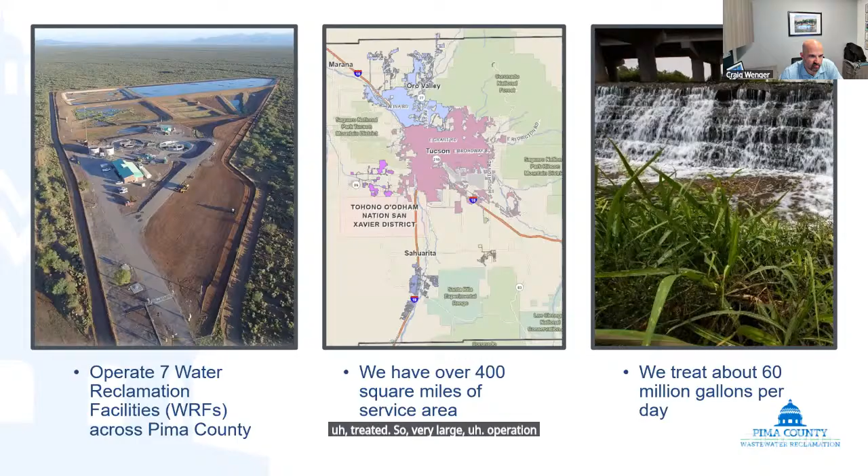Going back several years, there was the Program for Regional Optimization Master Plan, or ROMP, which led to 2 major water reclamation facilities being constructed, the Agua Nueva facility, as well as the Tres Rios facility. So this program that we're going to talk about today is really the next major regional plant that is being advanced.

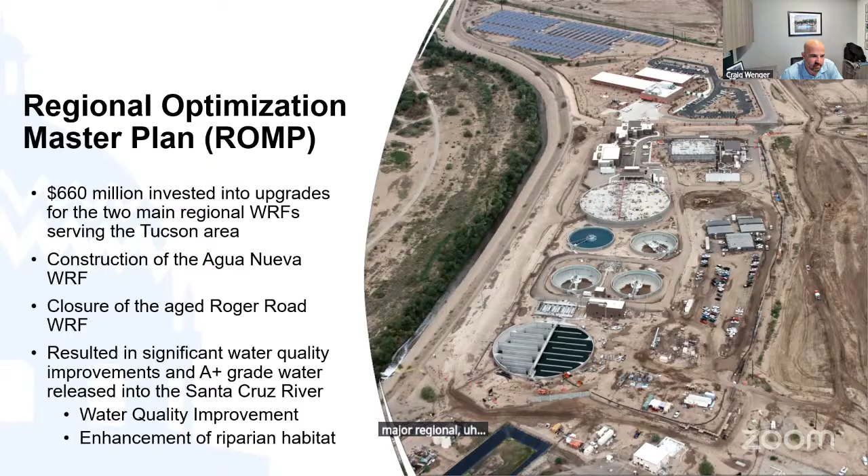So this is a major part of the capital improvement program for the county and for wastewater. There's 3 different projects as part of it: there's the new water reclamation facility, the Sahuarita, and then there's an interceptor, transporting the water that's going to Green Valley up to the new facility, and then eventually the closure of that Green Valley facility.

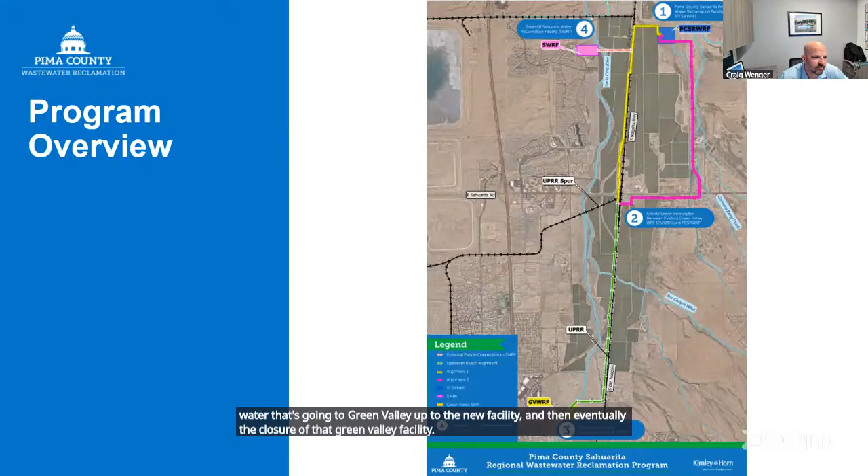So a quick screenshot of what we're talking about here. Green Valley is all the way at the bottom of your screen. And then all the way at the top here in the blue box on the upper right-hand side is the location of the new Sahuarita facility. That is a parcel that the county owns currently. Sahuarita Road is essentially right in the middle of the screen there, so we are transferring all the way up Old Nogales Highway up to the new facility.

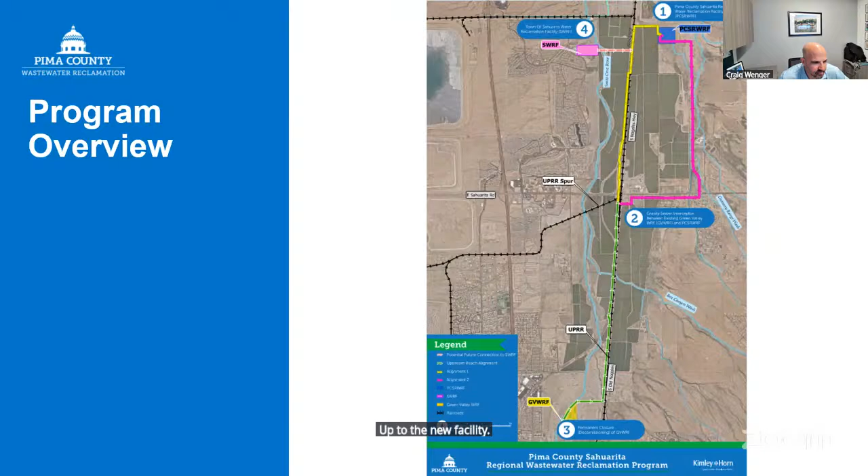So a couple different pieces of the program. Here's a closer view of the site that the treatment plant will be housed on, as well as some of the interceptor options, especially when we get up into Sahuarita Road. There's a couple different options that we see as viable for this moving forward.

We talked about the closure of Green Valley, and then finally, the town's water reclamation facility has a potential to tie over and ultimately transition to the new facility.

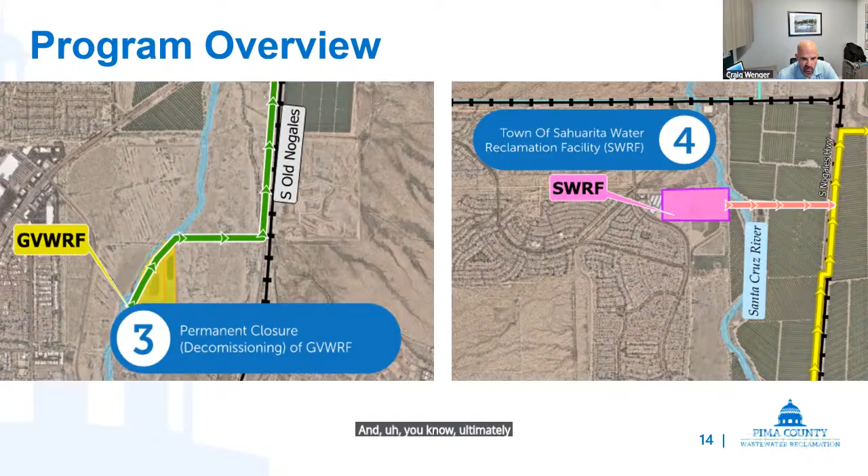So, decisions in progress. There are a number of things that we're working on right now: construction and operational access for the facility, the capacity and technology that will be the basis of design for the facility, the alignments as we were talking about, and lastly, the effluent options.

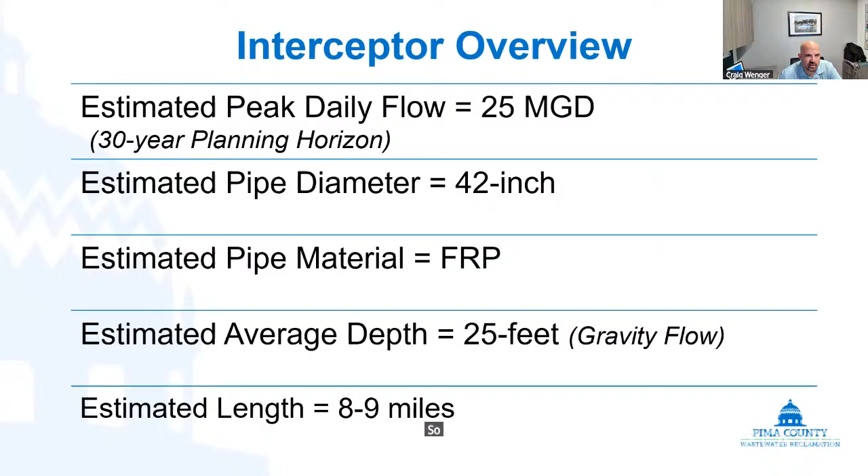So, Ale, you want to give a quick understanding of the interceptor? Yes. So right now, Kimley-Horn has been supporting the county on developing a few preliminary studies to determine minimum design criteria that we're going to be providing for RFQs. Right now, we have the interceptor, which is one of the studies.

Right now for the interceptor, we have an estimated peak daily flow of 25 million gallons per day, and this is over a 30-year planning horizon so far. We had an estimated pipe diameter of 42 inches with a pipe material of FRP or PVC, depending on the selected material or recommendation of the engineer when that one comes on board. Estimated depth, we're looking at about 20 to 25 feet, and right now it's all currently gravity flow coming from the existing Green Valley plant to the new regional facility. The estimated length, depending on the route, is about 8 to 9 miles of interceptor.

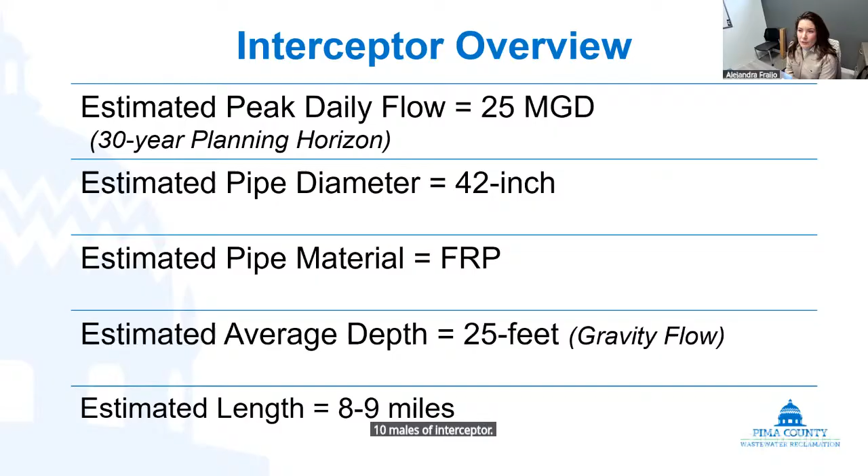All right, so like Craig was saying, we have evaluated 2 main alignments so far. We have alignment 1 and alignment 2. Alignment 1 is pretty much the one shown in yellow. You guys can see that there is a big chunk from the Green Valley facility up to Sahuarita that is in color green. Basically, the 2 alignments follow the same upstream reach, and we're gonna be pretty much on the western shoulder of Old Nogales Highway up to Sahuarita Road. Here is where the 2 interceptors start diverging. We have alignment 1, which is pretty much also on the western shoulder of Nogales Highway, all the way up to the new regional facility.

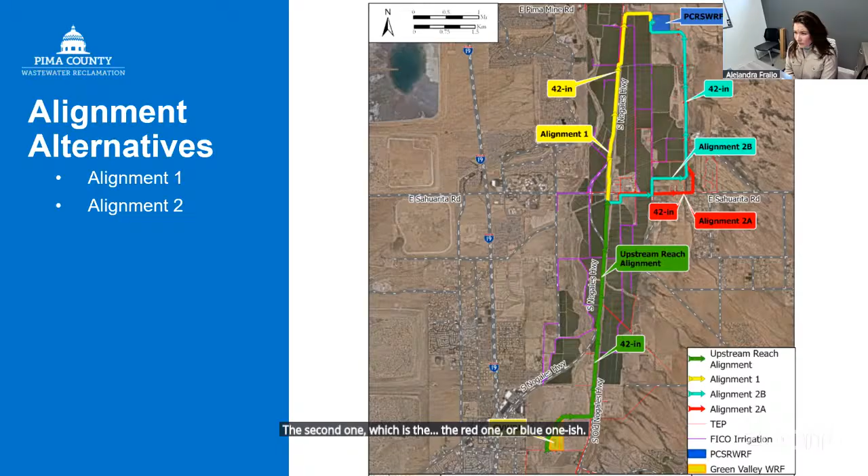The second one, which is the red one or blue one-ish, that one is gonna be going through Sahuarita Road and then going up north next to the pecan fields until we meet the Pima County regional facility. We can go into the next slide.

All right, so we are currently evaluating the facility, at least the treatment technologies that we're gonna be looking into for the new treatment facility. There's multiple options. Next slide.

All right, so the Santa Rita Resource Recovery Facility is gonna be built for approximately 8 MGD. However, when this plant starts operating somewhere around 2031, the initial flows that we're gonna be expecting are gonna be between 3 and 4 MGD. Right now, we are expecting those flows because the existing capacity of the Green Valley facility is about 2 or 3 MGD. So by then, we're anticipating initial flows of that, and then hopefully reaching its capacity of 8 MGD in the 30-year horizon. We are also designing this facility to have phase expansion capabilities here.

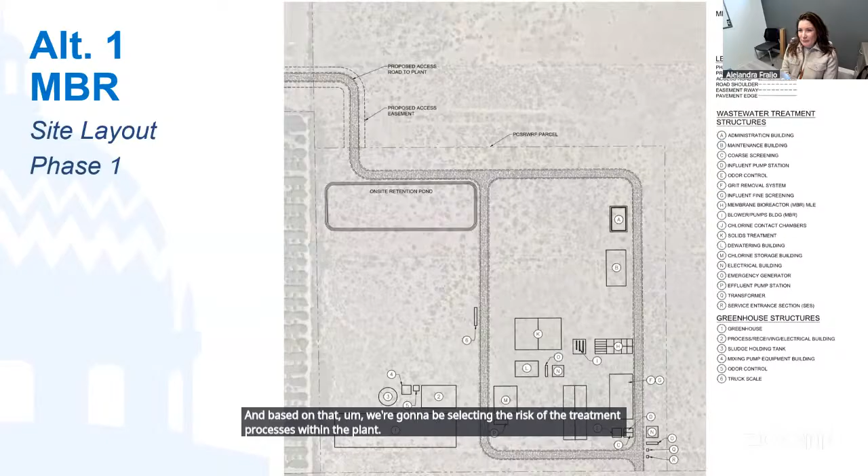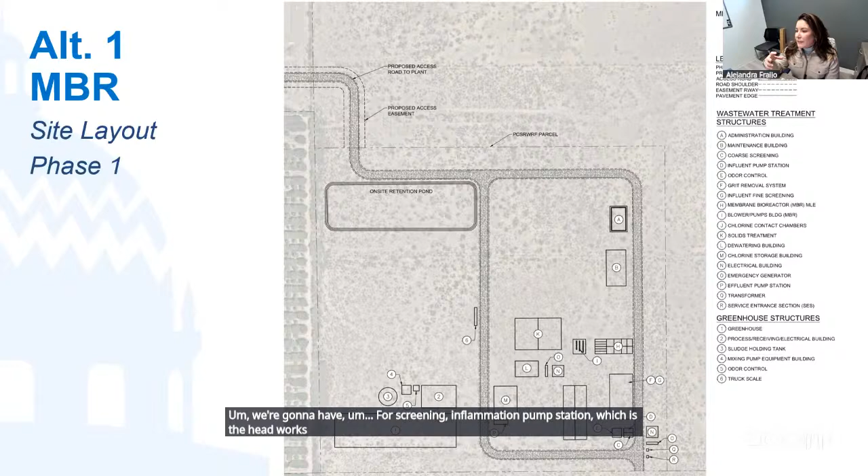More to come. Here we have, I'm just going to go through the layouts very quickly. We have the site layouts that we're anticipating for the plant. These are very preliminary. We have pretty much boxes and circles so far, but this is an approximate of how the plant can look like when it comes online. We're going to be having coarse screening, influent pump station, which is the headworks. We're also going to have secondary treatment. We're going to have tertiary treatment, which would be disinfection. And of course, we're going to have some solids handling in the plant.

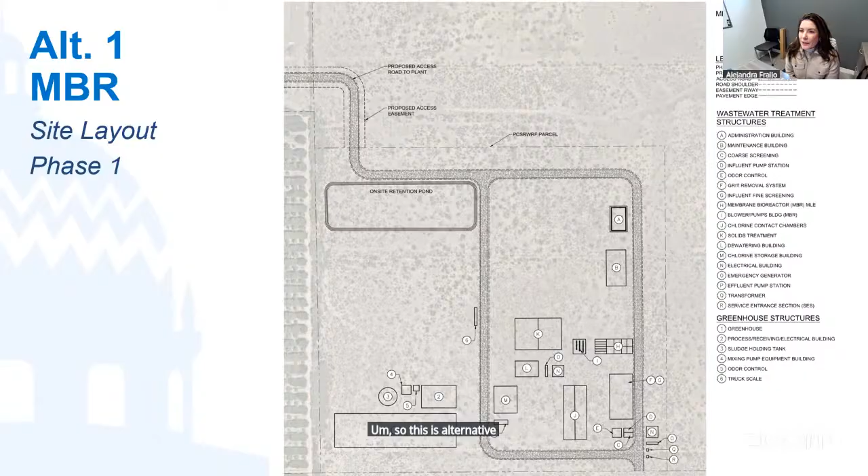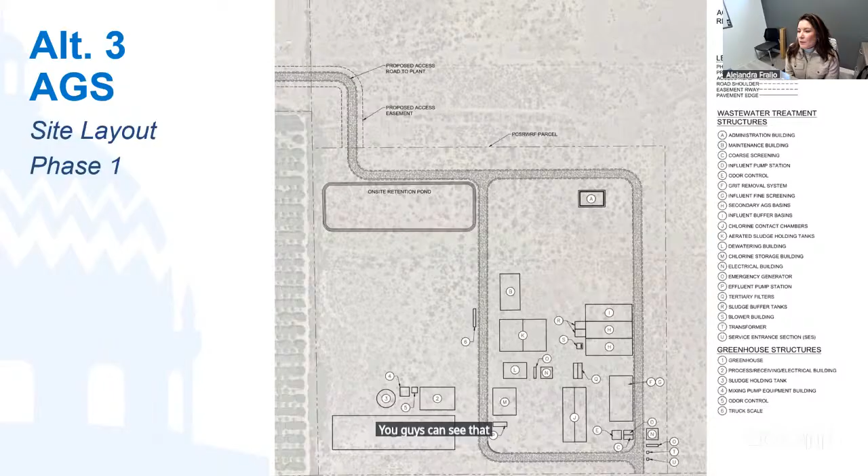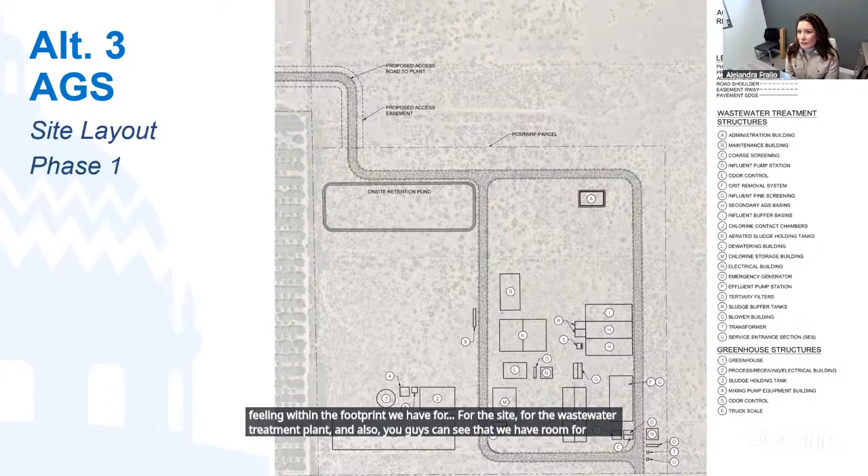So this is alternative one for MBR. The other two, if you guys go to the next slides, we have the MABR site layout. It has more equipment, as you guys can see, because depending on the technology, you're going to be needing more or less equipment in order to operate that technology. And AGS here is the other one, but all of them are pretty similar. You guys can see that these technologies are going to be fitting within the footprint we have for the site, for the wastewater treatment plant. And also you guys can see that we have room for expansion in the future. So yeah, that's basically so far what we've put together for the interceptor and the treatment plant.

Christina, you got a question?

I do. Alejandra, could you go back to that first map where you showed the site? It looked to me like there was a major wash going right through the middle of it. Wait. Go, I think it was. No, it's back a little bit more. It looked like there was literally, at the very beginning, like there was a major wash that came right through the middle of this site.

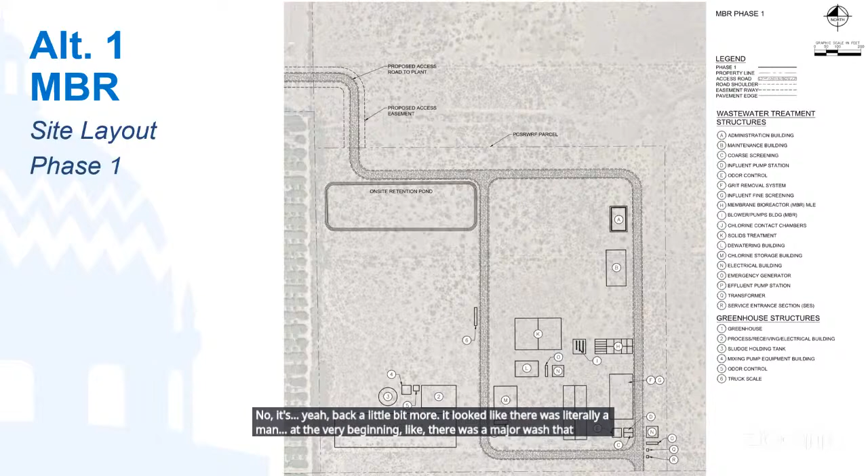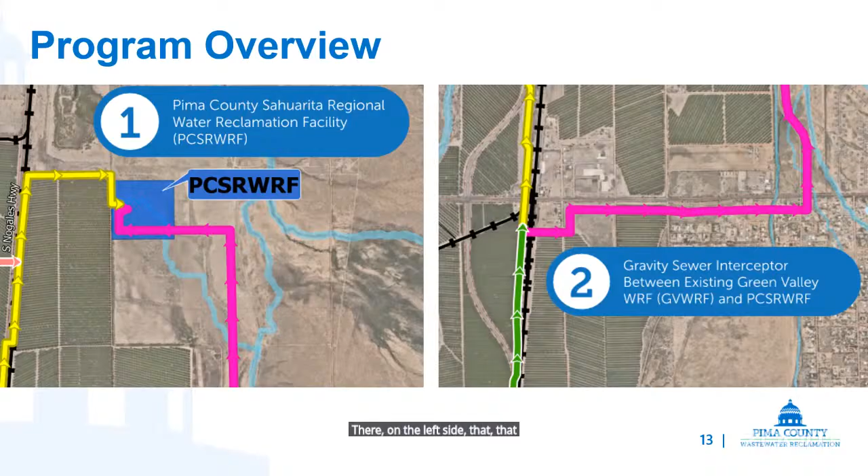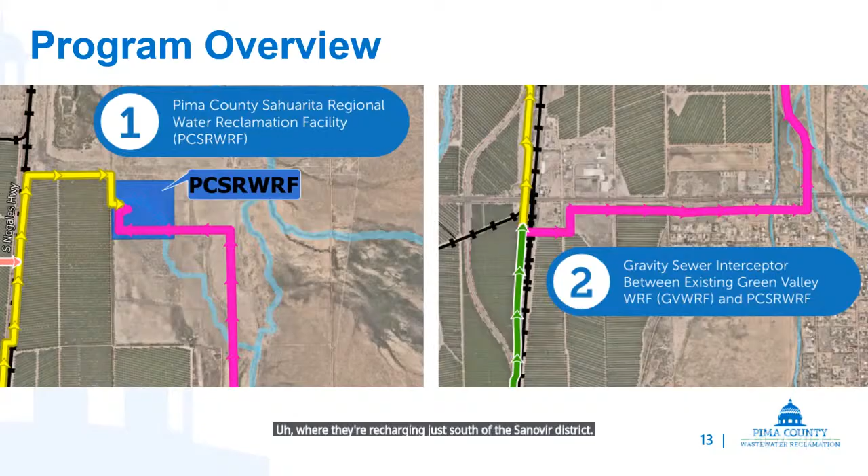Interesting, I'm not familiar with that recharge facility you're talking about, but let me dig into it, Christina, and then I can get back to you. Thank you, I appreciate that.

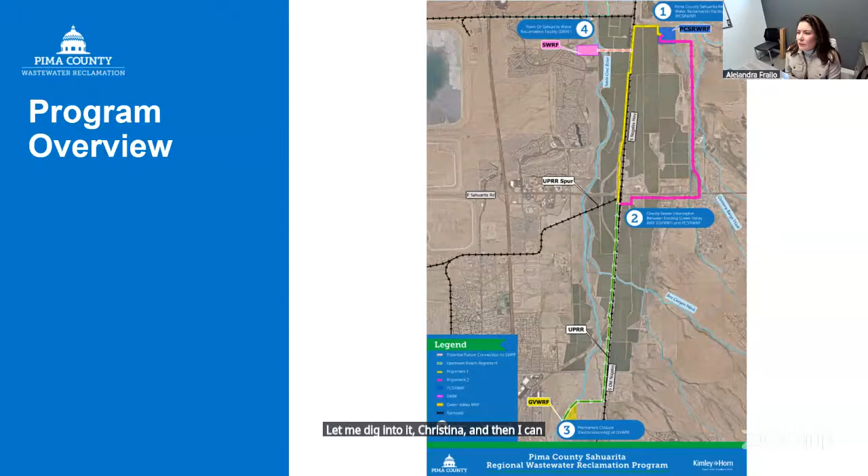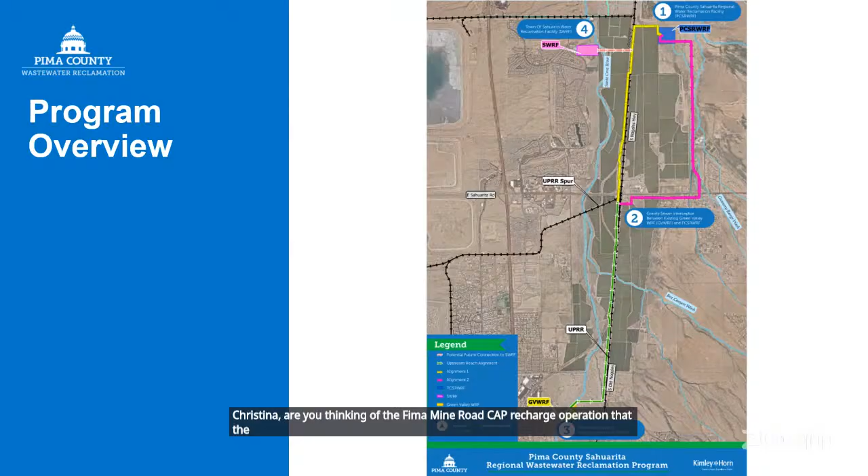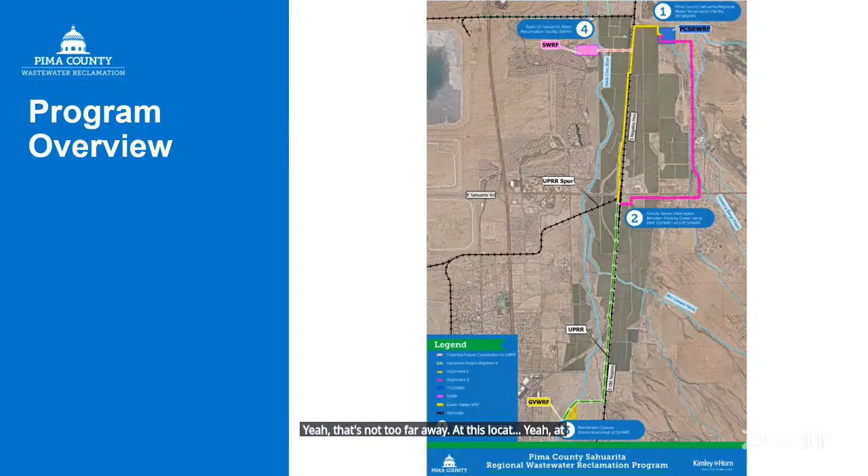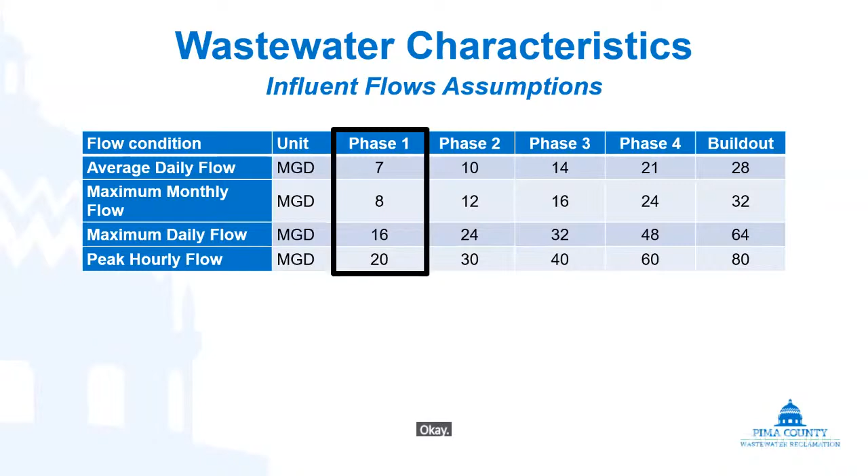Are you thinking of the Pima Mine Road CAP recharge operation that the city owns and operates? Oh, I might be thinking of that. That's not too far away at this location. At this location, the county, as far as I know, does not have a recharge project. There's the Renews just north, I believe, but I don't think that's operating, though I could be wrong.

I'm interested in what's going to happen to the wash in particular. We have a tremendous amount of nesting purple martins down in that area in the pecan groves, and it's considered an important bird area for that species alone. We're doing a lot of studies on that, so I'm curious about the impacts, in particular to the riparian areas.

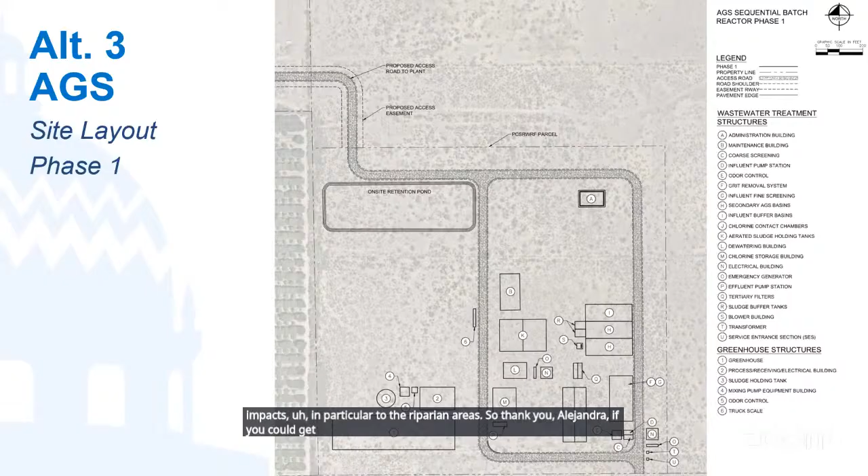So thank you, Alejandra, if you could get back to me on that, I won't take up any more of the committee's time. Sounds good. Yeah, we'll follow up with you.

All right, thanks, Ali. Moving on through effluent use. This is an area of the program that is still being evaluated. Ultimately, the decision on what to do with the effluent over time is going to be decided by the council for Pima County. So this won't be a Pima County wastewater only decision. They'll make a recommendation to the board.

So what is effluent? This is a quick little walkthrough, with some cleverly colored cups of water. It comes in as the worst, and as it works through the various processes of the treatment plant, what we send out the end hopefully looks as close to that clear glass of water as we can. The goal of this project is to produce that A+ effluent, not drinking water standard, so hopefully no cups of water coming out, but useful for discharge to recharge basins, or discharge to the stream, to the river, or any reuse, reclaimed use.

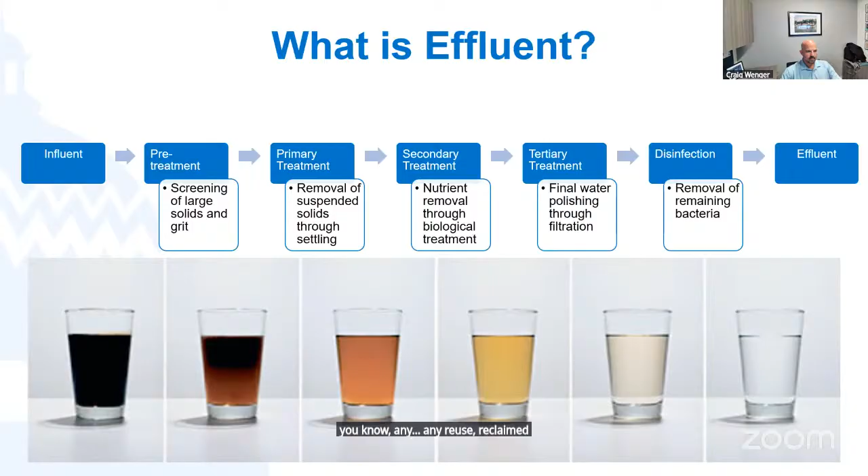So there's a number of options being considered. Like we talked about, recharge and storage of that water, using either constructed recharge facilities, some of which may already exist that we can take advantage of, or building new ones for this project. Natural stream recharge, which could include going to the river right there, and then groundwater offset supplies, so private buyers for that approach, community uses and seasonal uses.

There's been a lot of discussion with the county - not necessarily tied to this project, but the county has goals to try to help the golf course program get off some of the groundwater that's not on a reclaim system. The mining industry and other businesses that need it, the FICO group there growing trees in that area, as well as other community water providers.

And then a hybrid approach. It's important to recognize that, as Ale pointed out on the scaling of this project, we don't have to make one decision that applies to all phases of the project. As more development, more water, more wastewater gets to this facility, as we cross certain thresholds, that may trigger other uses for the effluent.

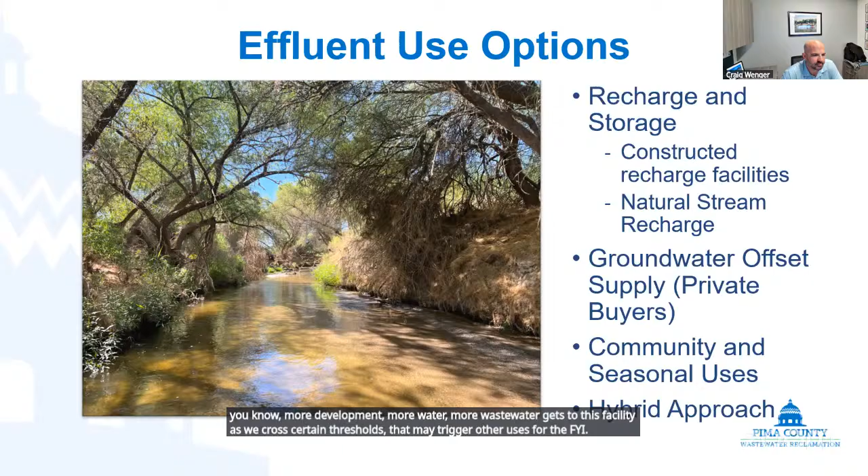A couple of those worth mentioning are the benefits we've seen from water being discharged to the Santa Cruz River, reuse water being used for golf courses in the northern parts of the county where the reclaim system for Tucson Water exists, water being used to offset development projects and mining operations and things like that. There's been a really successful use of this effluent as a resource.

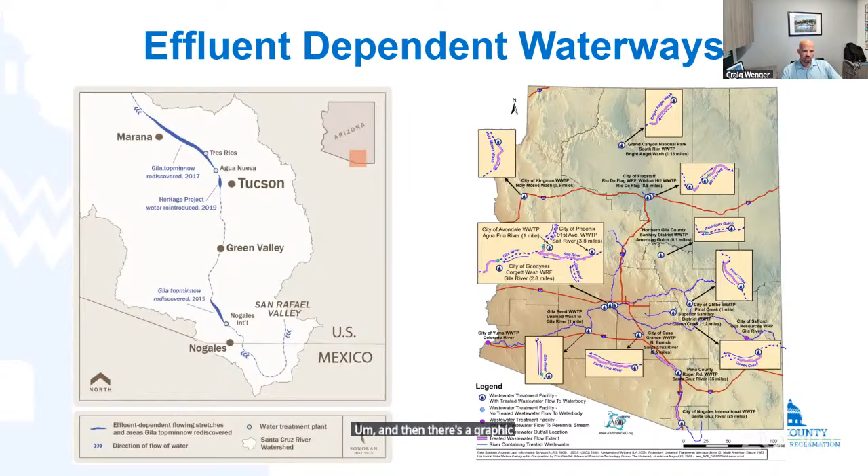There's a number of effluent-dependent waterways in the state, but also in the region. So we have a quick screenshot here of Santa Cruz and the various projects that have come online to add effluent back into the system there, and then there's a graphic on the right-hand side that shows this at a higher level across the state.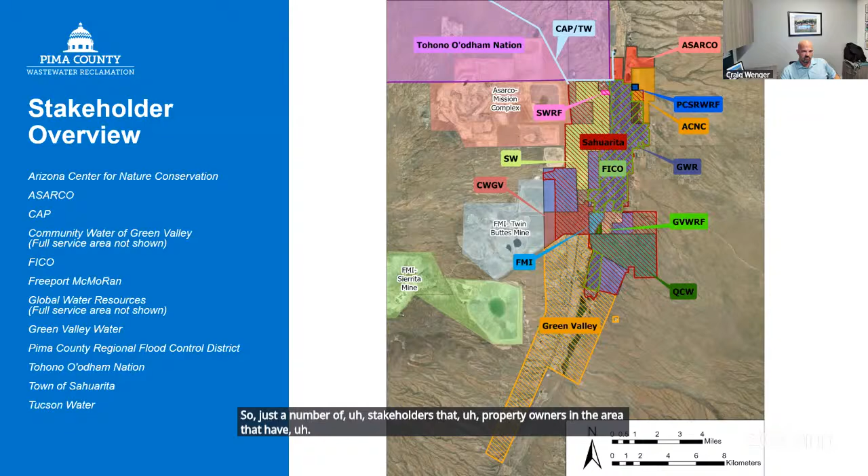And then we've got the Tohono O'odham Nation downstream on the Santa Cruz there. Further south towards Green Valley, we have the community in Green Valley and also FMI's facilities. So just a number of stakeholders and property owners in the area that have shown a large interest in where this is going.

Okay, so timeline. Ali mentioned that we have some different stages of the process happening. There will be two project managers hired to oversee the plant design and construction, and the interceptor design and construction. So hot off the press, the PM RFQs are actually published today, out on the street as of this morning. So if any of you are prospective PM firms, please make sure to go take a look. We're very excited to get all of the submissions for those two contracts.

In the next several weeks, we'll be putting out the next round of RFQs for the engineers and the CMAR contractors. During the March timeframe, we'll be bringing on an engineer to design the interceptor, an engineer to design the plant, a contractor to build the interceptor, and a contractor to build the plant. So that delivery will utilize the CMAR method.

Construction is anticipated to begin around 2028, with hope that the plant is online by 2031. Then in 2031, once the plant's operational and flows are shifted, we'll be looking at decommissioning the Green Valley facility.

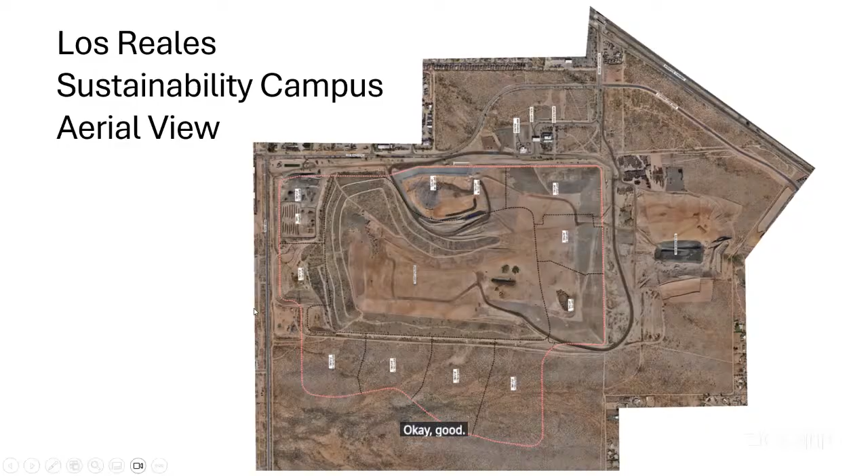So just to give you an idea, I wanted to give the aerial presentation so you can see. If you look at the red dotted line, that is the permitted area for Los Reales landfill, our permitted fill area. Currently, if you follow my cursor, this is the unlined area, historically for the landfill.

And then we have cell 1, which is a lined landfill cell. Cell 2, cell 3, and then 4A and 4B. So we are currently filling here in this area. The entire site is what encompasses the sustainability campus.

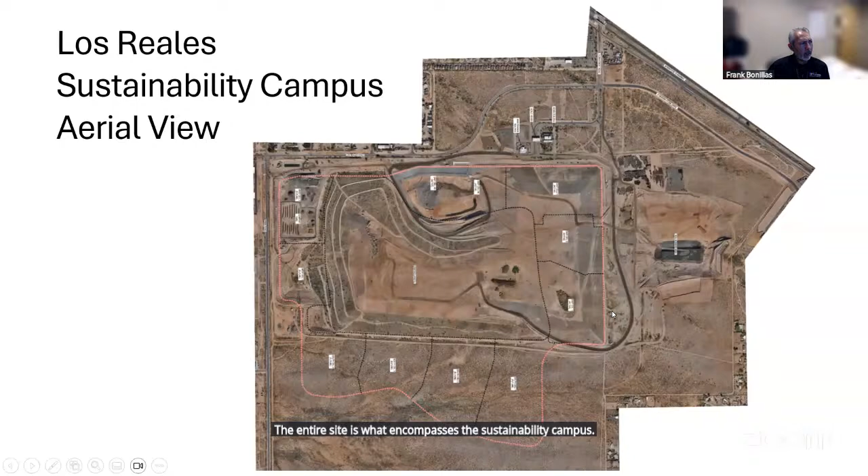And now, of course, the 2025 revision is basically to envision the sustainability campus, geared to achieve the city's zero waste goals. So the primary goal for doing the revision was to rename the site to the Los Reales Sustainability Campus, and then expand the boundaries to include an additional 44 acres the city acquired in recent years, for a total of 1,136 acres.

Also, the revision would establish tailor-fit development regulations under the Unified Development Code, and then minor text edits that we needed to do.

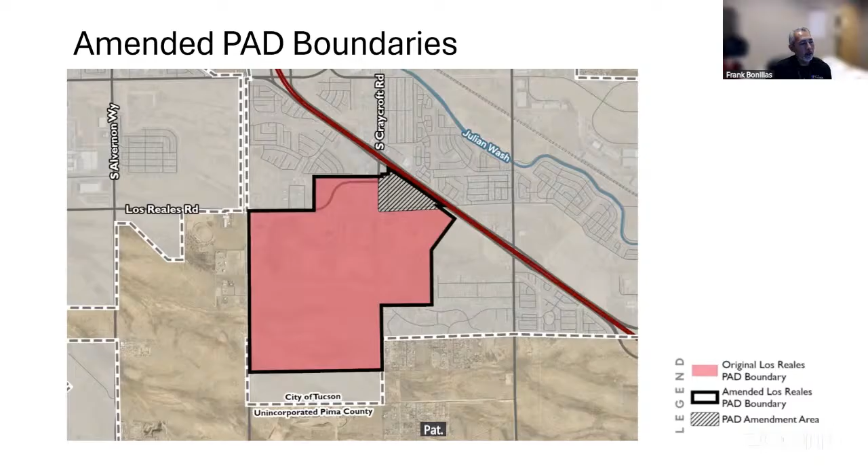The main pad is divided, the revised pad, into two districts: Sustainability Campus District and Open Space and Recreation District. For the sustainability part, we're defining specific waste reclamation areas. We're also establishing the commercial eco pads that I mentioned. And right now we have an RFP out to see if we can site a recycling facility, a materials recovery facility, at this location.

We're also looking forward so that we can use the landfill gas and develop a landfill gas to energy project. With the organics diversion we're doing, we currently have a compost facility, but as more diversion happens, more food waste and green waste coming in, we're going to have to expand the facility. So we're also looking at establishing a state-of-the-art compost facility.

On the open space district, we're including a location for parks and recreation space for Tucson Parks and Recreation to establish a park on site with ball fields and other amenities, which I'll talk about more towards the end. We're also looking at open space so we have a good buffer zone around our waste reclamation area, around the entire site, including a multi-use path.

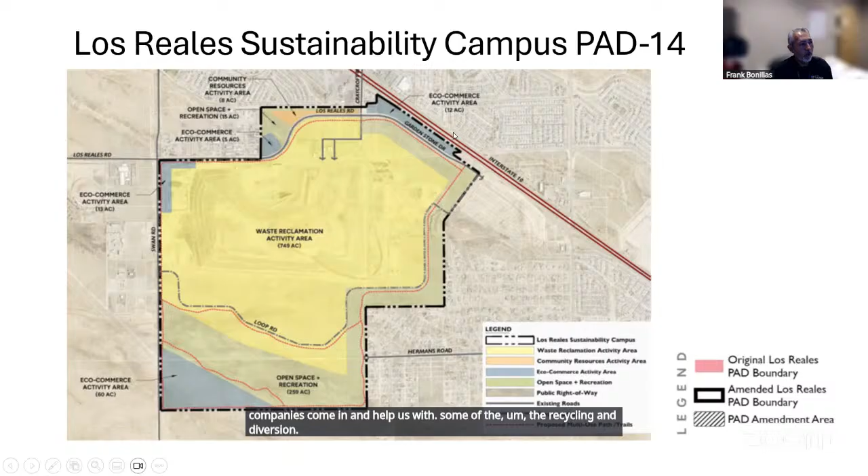For the park, as I mentioned, in the top area, this is the ballparks that are being proposed up here in this area.

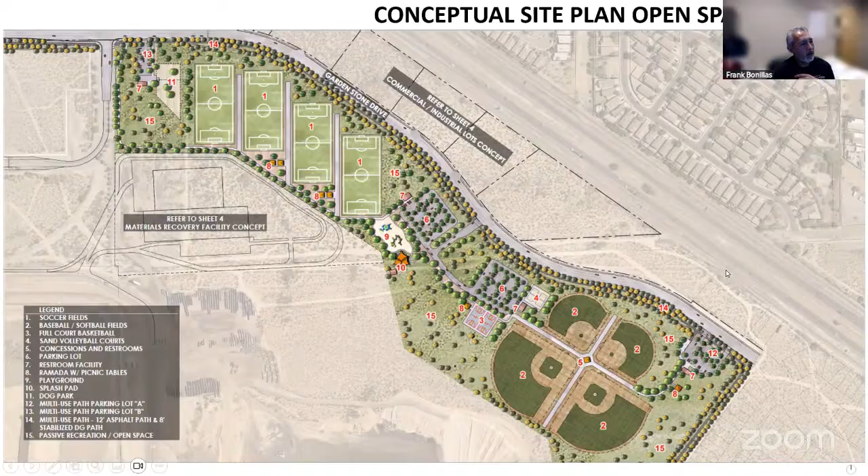And then the eco pads - this is just a concept, so we can have as many as you see here, or we might have less than this. If we need smaller pads, if we can accommodate those, that's basically what we'll end up having.

But this area here and what you see here would be a material recovery facility, and this is where we're proposing that it would be sited within the site.

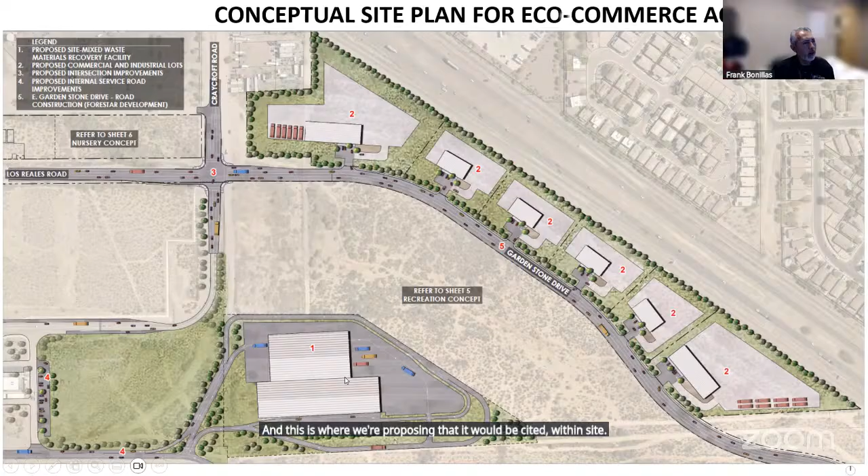The bottom here, you would see it's mostly the Los Reales Road, possibly.

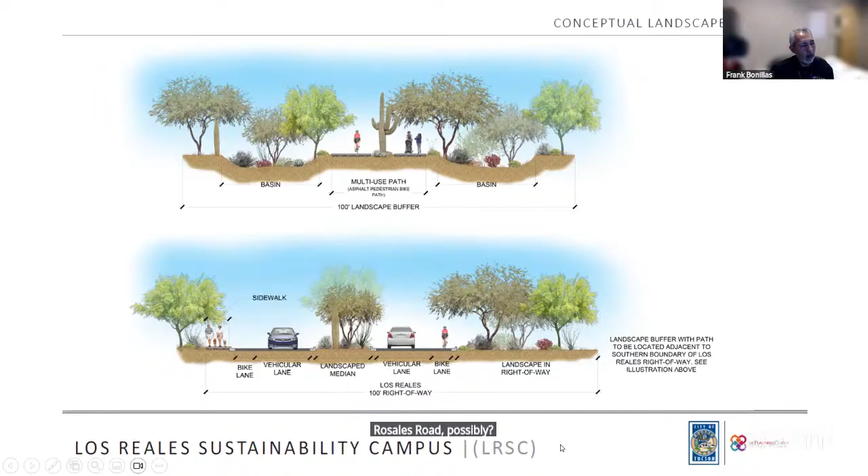Just to give you a quick overview of our current operations, which fit into the pad, we have scale house management, household hazardous waste. We are engaged in green waste, food waste, and animal manure diversion, primarily right now from the zoo. We are creating compost, and that compost is being provided back to the community, to the golf courses that the city owns, and we're working with Tucson Unified School District right now with school gardens as well.

Then I mentioned the recycling center. We also have an asphalt recycling initiative here on site, where we are recycling all the asphalt millings from road maintenance throughout the city of Tucson. And then, of course, the Million Tree Initiative.

And just quickly, to give you an overview, we currently receive around - this number is a little outdated, that's 2023, but we're up around 760 to 780,000 tons of waste material that comes through this location. We are a regional landfill because we accept waste not only within the city of Tucson, but from Pima County or any material that might be disposed of.

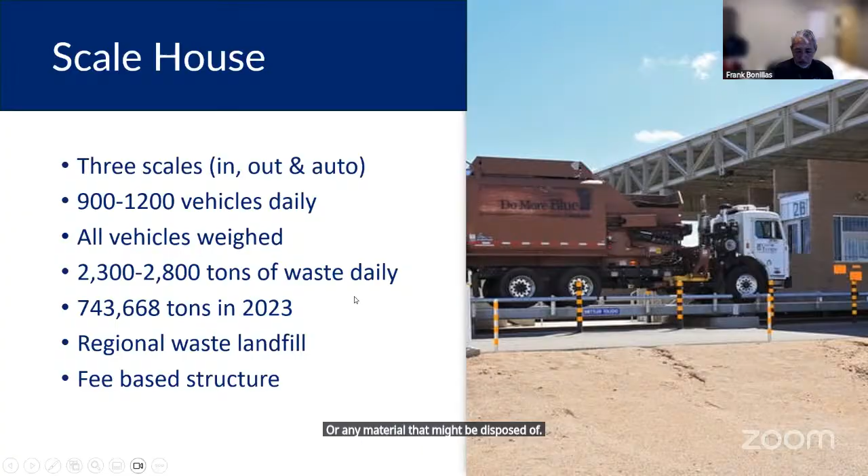I mentioned, of course, we are primarily a landfill. But as time goes and we divert more materials, that should be on the lower end of the operations that will be existing here at this site.

Household hazardous waste, we also went through a recent remodeling of the facility here. Traditionally, a household hazardous waste facility was off-site. It is now located within the campus, which is why we went through the modifications. We added safety storage for the hazardous chemicals that come through. Then we have a processing hood where all the consolidation happens here.

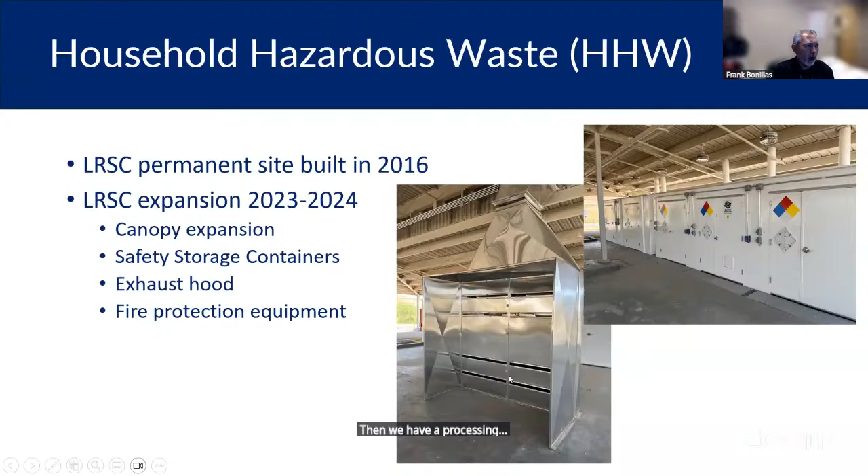And I mentioned compost facility as well. Just as feedstock, we do run a windrow operation. And with some of the state of the art, what we're looking at to improve is possibly doing a covered aerated static pile system.

But that requires much more throughput through our facility. We include in our composting food waste, the zoo manure, which we call ZooDoo, and green waste. As far as manure goes, as we expand, we'll also be able to accept and include horse manure from local horse stalls, as an example.

With the food waste diversion, the city of Tucson has a commercial food waste collection program, which we work with the Compost Cats from the U of A. We also have a food cycle at home, which is a residential collection program that started in early 2025.

We're also diverting green waste that comes in from landscapers or just from self-haulers, people that do their own maintenance at home. We separate as much of the green waste as we can if it comes in a clean state. What we don't include is palm fronds and cacti, because those don't necessarily compost well in our system.

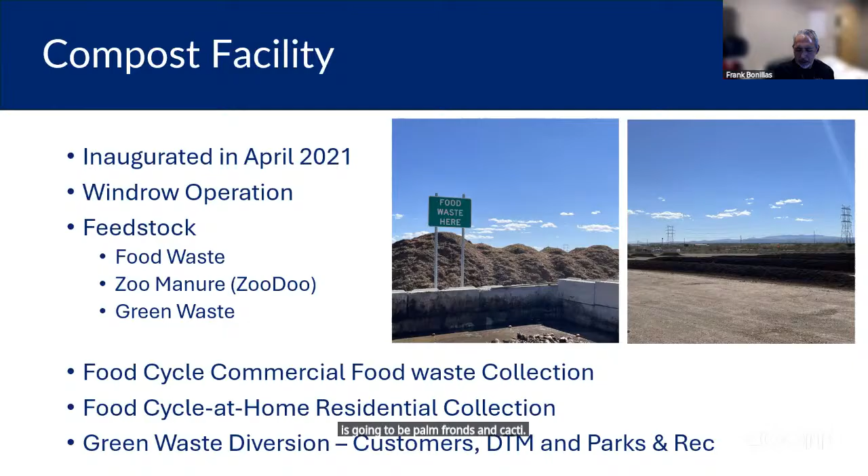ByFusion: the city of Tucson has partnered with ByFusion, a company that is coming out to Tucson. We're building this facility. It's in the process of being completed later in the spring, and operations should start by the summer of 2026. These are what's called the ByBlocks, which are used in building, which are the blocks that will be produced by ByFusion here at this facility. They're currently operating out of California, but they will be moving their operations completely to Tucson.

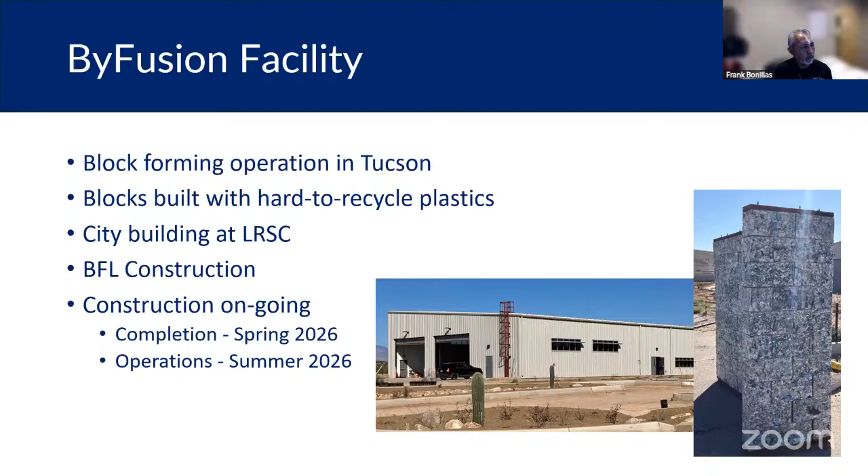And then, of course, we have just a recycling center where the public can come. It's mostly like a neighborhood recycling center where we accept all the recycling, the glass, traditional recycling materials, cardboard, appliances, tires, and of course, any metal that people bring into us.

I mentioned the asphalt recycling. This is here on site. You can see down here the crushing unit, screening and crushing for that asphalt. The millings come to this location, and then it goes through the crushing and screening operation, and then it's reused with emulsion for the resurfacing of some of the streets within the city of Tucson.

We started with a pilot, but currently they are here at this location, and moving forward, once we establish specifically where they're going to be located, more than likely within a 10-acre site, then we will have a more permanent, long-term operation within the site. They do have their own separate air permit from our facility.

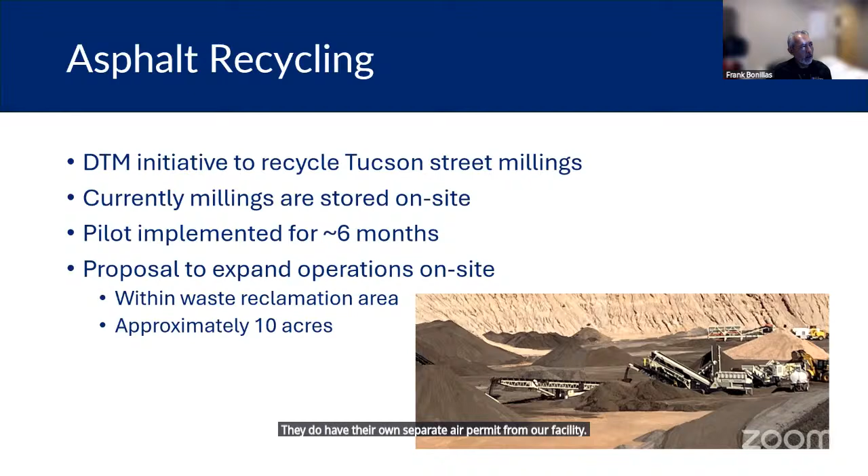And then the tree center, just to give you a little view of all the trees that are being grown here at the site, are on pots by Tucson Clean and Beautiful. Through that initiative, we're in the process of expanding their location. They've pretty much outgrown this, so we're adding another 150 by 150 area just adjacent to this one. This tree center started in 2023, and by the end of this year, they're going to have the extension.